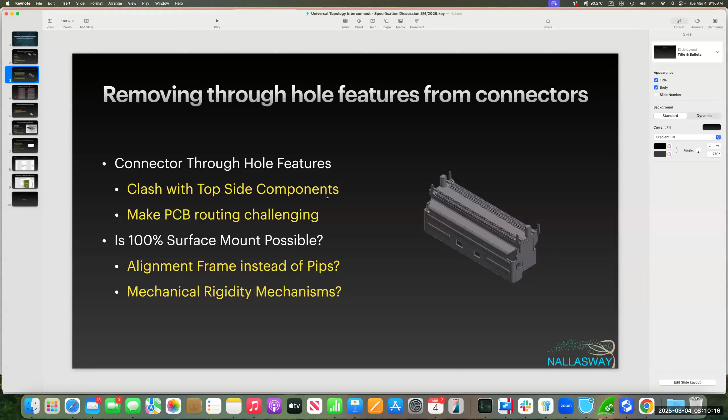Also, one of the features was removing the through-hole features, so that was that discussion we've been working on. I had a preliminary pinout proposal, and Amphenol and Lotes proposed an updated pinout to be more like the standard MCIO. So I need to update that table specifically, and I'll come on to that later. We are also looking at the capability of having this active cable thermal interconnect for mating to cold plates. And now getting on to the meat of the discussions I've been having with Lotes and Amphenol.

First of all, this is a recent email from Howard, you and your team, and I just summarized it here. So you're sending a cable to me, a PCIe Gen 6 cable. You noted that it's 26 gauge, so quite a thick cable. The raw cable thickness you said is 2 millimeters. Can you confirm that's two twinaxes on top of each other, like in this picture here? Alan, that should be 29 instead of 26. 29. Okay. That's basically two ribbon strips. So 2 strips is 2 millimeters. It's 2 millimeters, yeah.

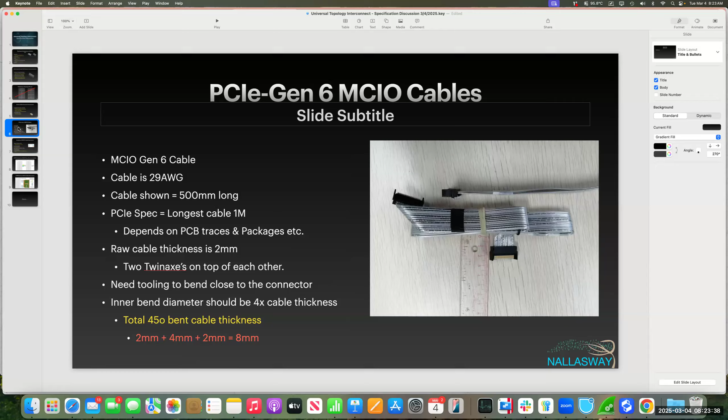I'd like to speak up here. I was thinking about 1 millimeter thick for the cable, and up here it says the raw cable thickness is 2. So I think we need to go back and look at our formula. But that's two twinaxes on top of each other. I think it's 4 for two twinaxes, because I just heard that a 30 or 29 gauge is 0.9 thick. I think we need to clarify how thick these cables are, shielded, insulated, everything. Is it actually 1 or is it 2?

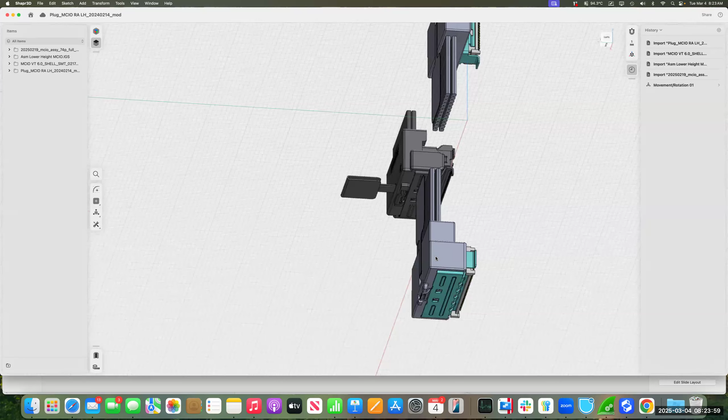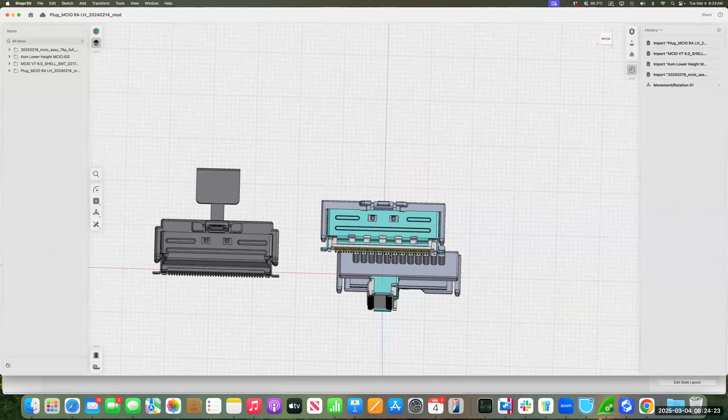This is probably a good time to jump to the models. Here's the models you sent me. This one on the right is what you sent me, Howard: the two pieces and one fully assembled piece. You've done the surface mount, except we don't have the left hand, right hand we were discussing. I don't think that's holding anything up. We still have a 0.3 gap. Oh yeah, for sure. But it is possible and you can do it? Yeah, it's just a stamping thing. Okay, good.

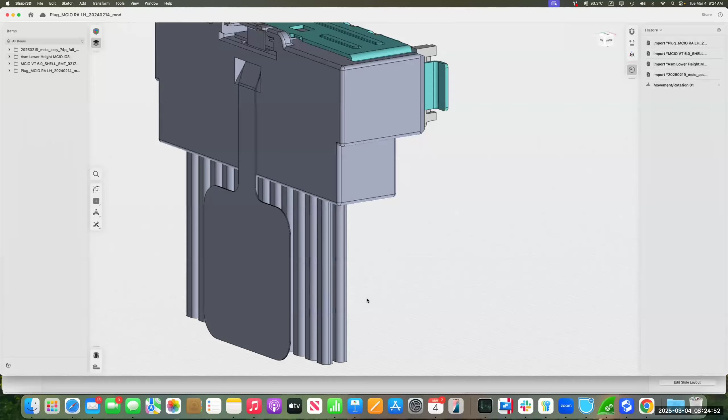Can you do a measure for that cable? Yeah, I did. I don't know if this model is representative of your 29 gauge, but an individual cable is 1.04 thick. Then you have a gap between them, but I'm assuming we can compress that gap. Yeah, as soon as it goes around the bend, it's going to go tight against each other. That's 2.505. So it looks like 2 millimeters is correct. I just don't want things to move forward and not be right.

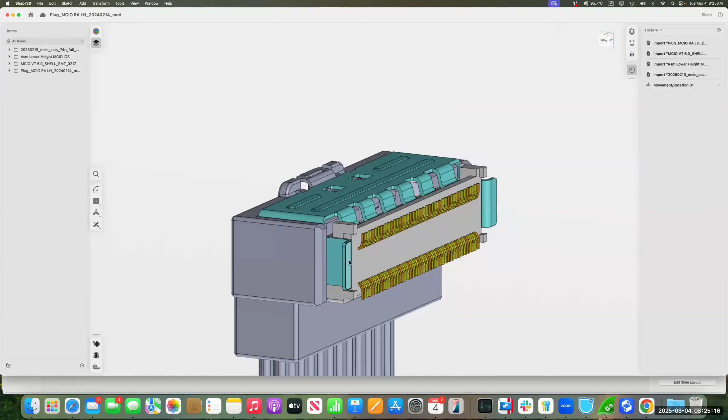All right. The other thing we were discussing was height. Sorry, not that, go right up to that. So you're at 9.18, is that right? That's low profile. Is that what you said? Does that add up?

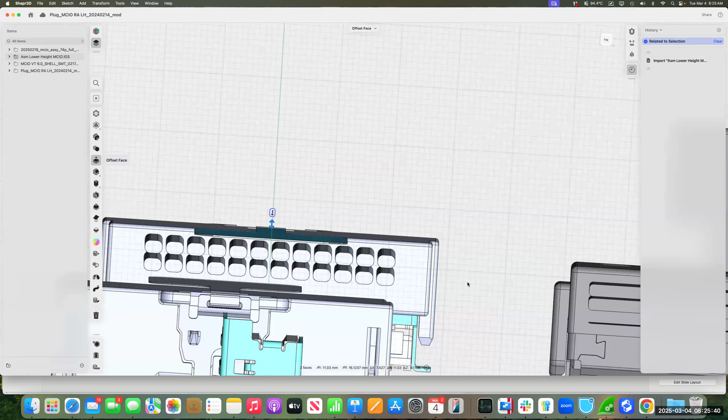I do remember you saying in one of your emails, actually, Howard. I'm looking at the numbers. Looks like 11.03, two faces on the text. Close to it, yeah. The height. Oh, hang on a minute. Have I got? Hang on. That's a good point, actually. Let me just reorientate myself to make sure I've got the right Z.

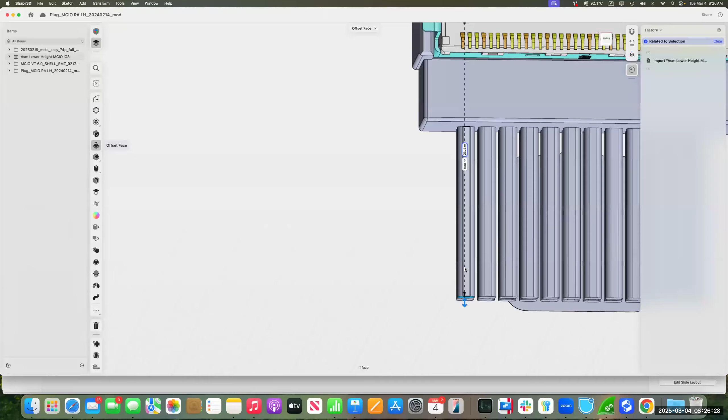Yeah, so Z is up and down. So that's 9.18. Oh, which way Z is? I think this is Z. Yeah, because this one is going to be the long. No, that's 23. Oh no, it's actually between the things I highlight. I'll tell you what, let me get a center pin here. If I get a center pin, we'll be sure we know we're looking at the right number.

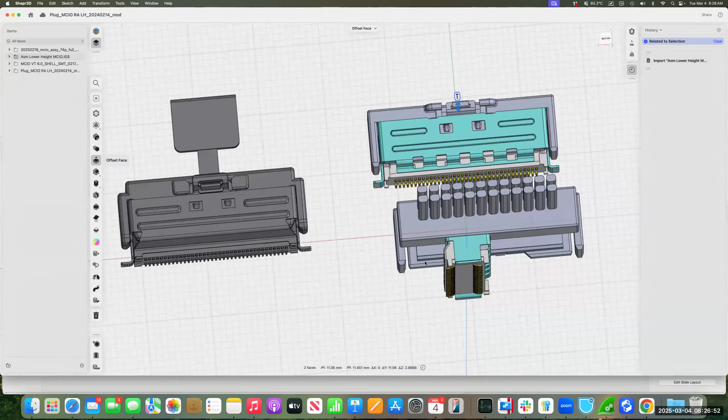To the tape. I do this. And that measures, oh, 11.06. Thank you. 11.06. That's a Y dimension, not a Z dimension. So Z is in the page. All right, fair enough. 11.06. Right, okay.

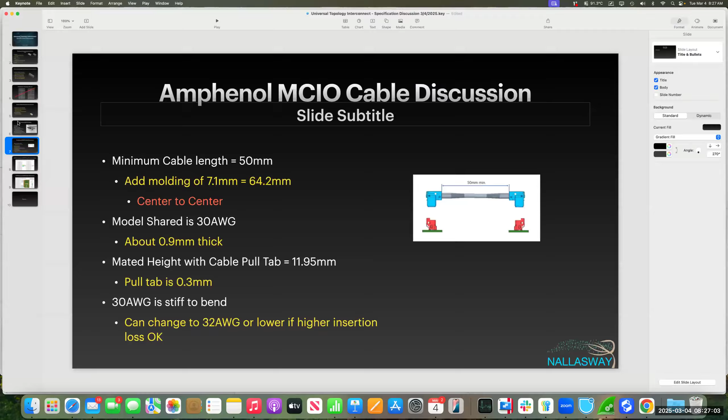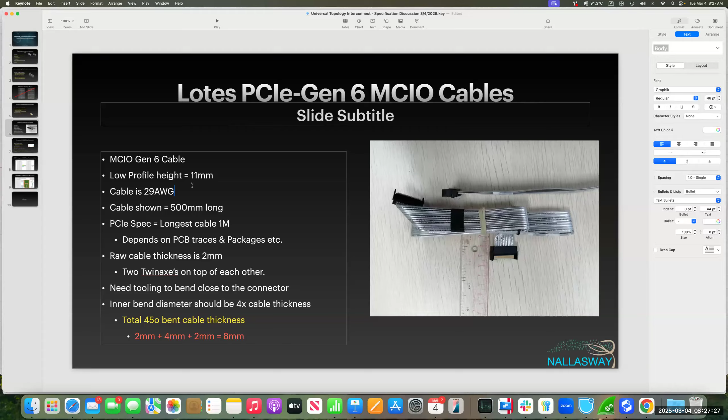So actually, let's just throw that in there. Actually, I might make this back to notes because there are generics in there, but there are also specifics in there. So let me just sort of throw in there: low profile height equals, I'll just call it 11 millimeters, round numbers. Yeah. All right. Okay, good.

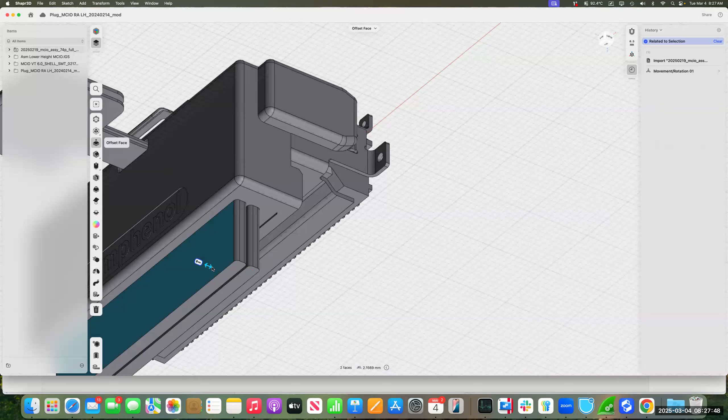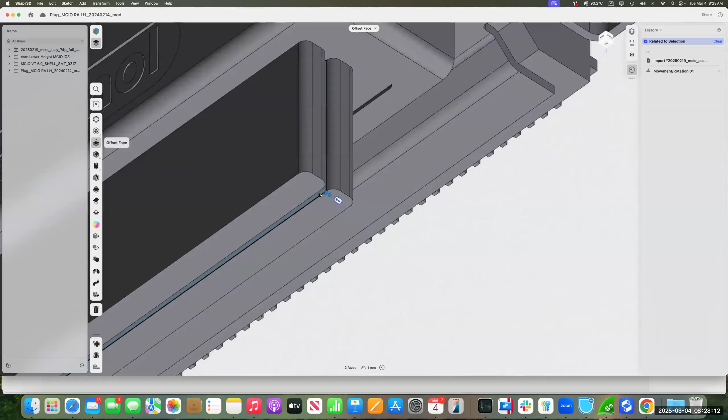Going back to the model and looking at these ones. So the one you sent me, Z, is this one just recently. And this one, I think when I've seen your models before, that's 2.1569. So okay, so that is right. So this is your 30 gauge version, I'm assuming. Yeah. So you've just got it around 1 in the model. Is that just for simplicity's sake? Yeah, just simplify.

One thing I did notice when you bundle them into a round cable as well, I noticed that the diameter of your models of the bundled round cable on a by 16 and a by 8 were identical when you've got twice as many cables. So it would be good if you could ask your modeling people to make it sort of representative. It would be helpful for us trying to do some space planning.

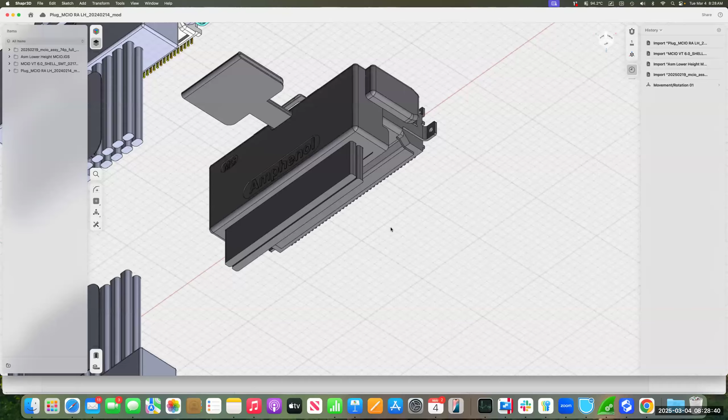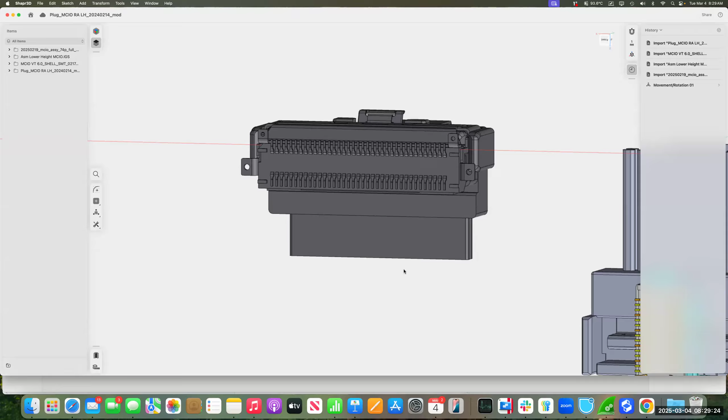All right, so now you've made this surface mount as well. You've gone slightly different. You've added additional feet here. I'm not sure if that's going to cause us any issues, and probably not a bad idea for balance purposes. Yeah, so we think when those through holes are removed, you need some stress relief, right? For the solder joints. So for pulling on the cable, especially as hard as we're going to be bending this thing, that gives us some torque support.

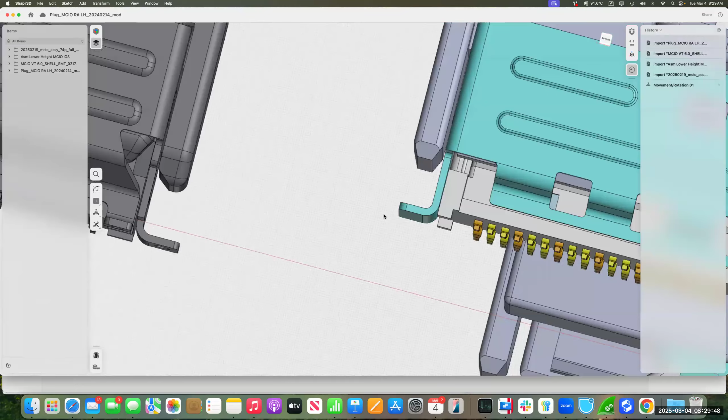Yeah. So I'm not objecting to any of that as long as it works in terms of centering everything. The only thing we are going to do is, with this foot, this foot should be 3 millimeters from what we discussed. Hopefully it's not 1.5. What does it say? 1.65, and it's buried. So we need to make that. In fact, there you go. From there to there is 1.4. So what we were wanting to do was make that 3 millimeters, and then a left and a right.

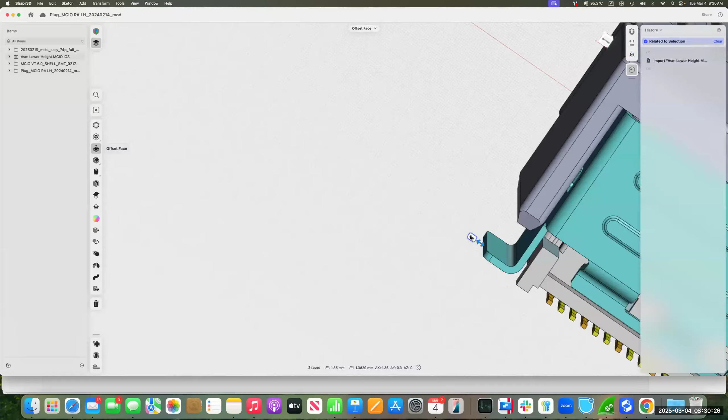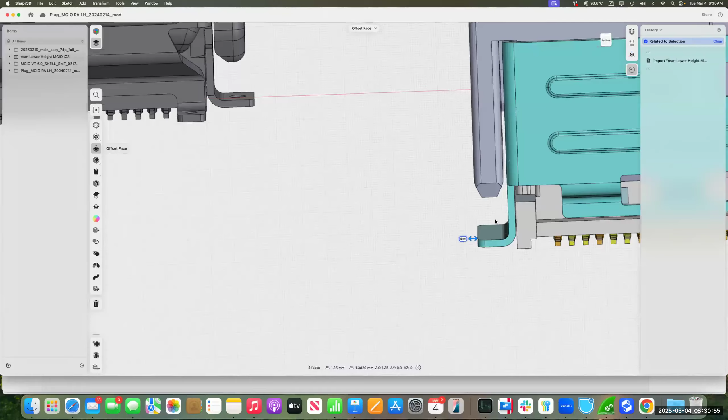Yeah, but if we're looking at the surface area, which is what is going to give us the retention, it doesn't make any difference because I've got to cut away half of this foot anyway in order to take the left hand part. Right. But for my model, we're gonna put a stiffening frame that will land on these feet. Yeah. But still, even if it lands on those feet, applying a torque to that is going to be thousandths of an inch in order to break the solder joint. And the hole that's shown here gives a well for the solder to wick into. So there's some nice features here with this additional foot and the holes through.

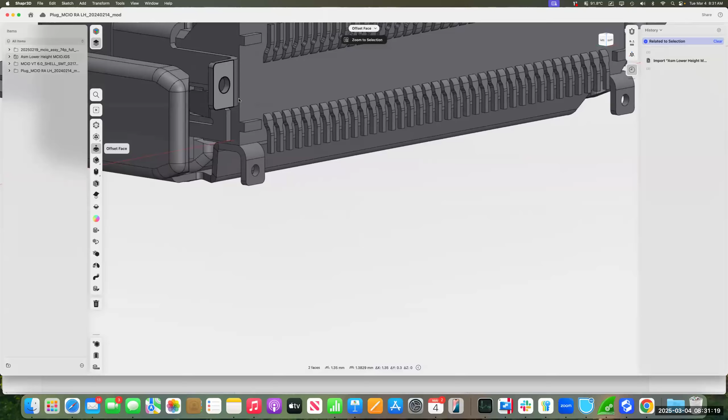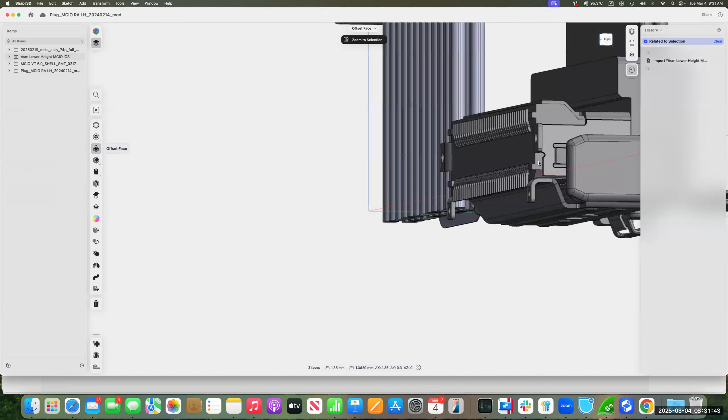Oh, and actually I see that you've done it left and right. You've done it left and right-handed, have you? No, you haven't. No, they're right down the middle. Well, not exactly right down the middle. They bump into each other. They do bump into each other, but they're not right down the middle. So is there any way that we can make these? I mean, these look smaller. It looks like we could put another foot on here.

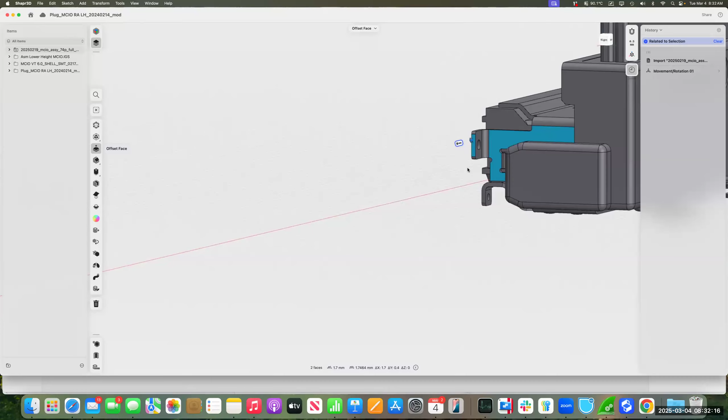So could we put this one down there and then that one up there? And then how long have you made this, Z? Let's have a look at this one. You've made it 1.7 as well. Yeah. So, I mean, if we could make that 3 millimeters, then again, I don't mind. You'd end up with a smaller foot offset, though I don't know whether they would help each other or not, depending upon how they're lined up.

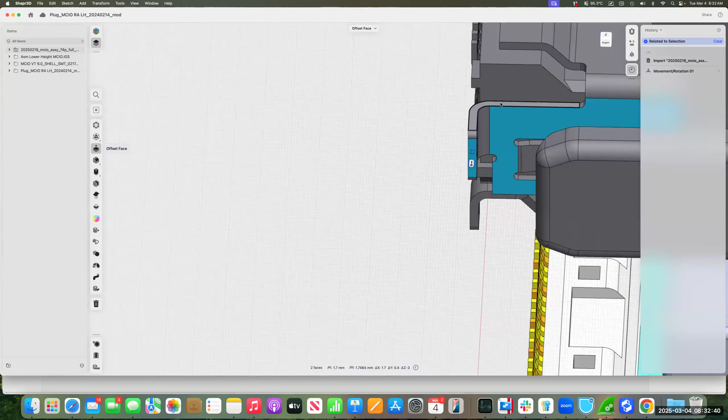Well, so you say a smaller foot. We've got this at the moment. This foot is coming from here to here, right. And then you've got this piece at the bottom. I don't know if that dimension there is exactly the same. Hang on a minute. Let's do from there to there. It's 2 millimeters, right? And then from here to here is 1.64.

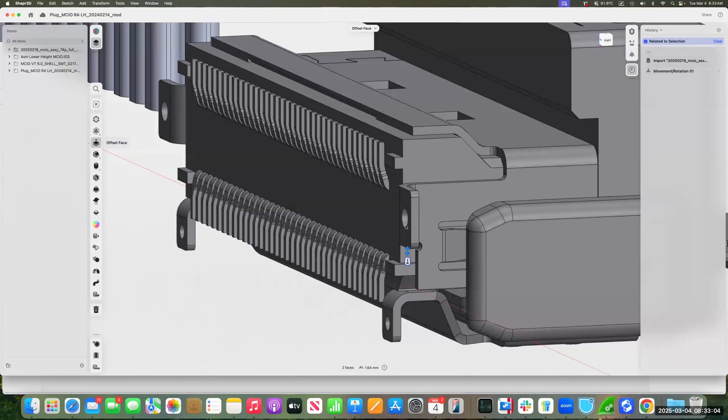So you'd have to make it 1.8 or something, 1.8 millimeters instead of the 2, and then do a left and a right hand. But do you know what I'm saying? If I put a right hand and a left hand together, I've got to remove material in order for that hand to come up close. Okay, I'm going to draw a picture. You drawing? Yeah, I'm drawing in Paint. I see. I mean, it looks like this one isn't too far off. I don't know what I'm missing here.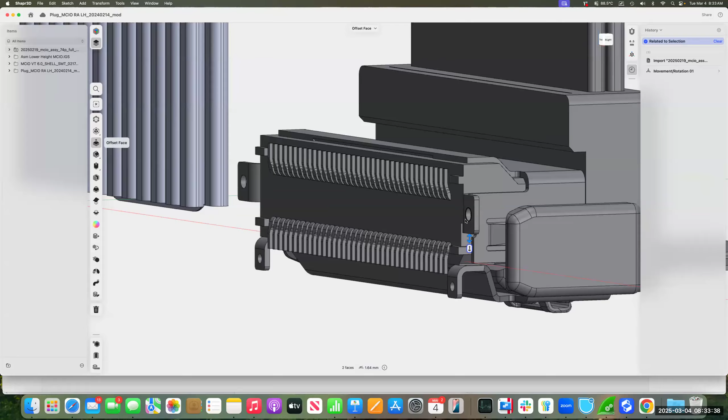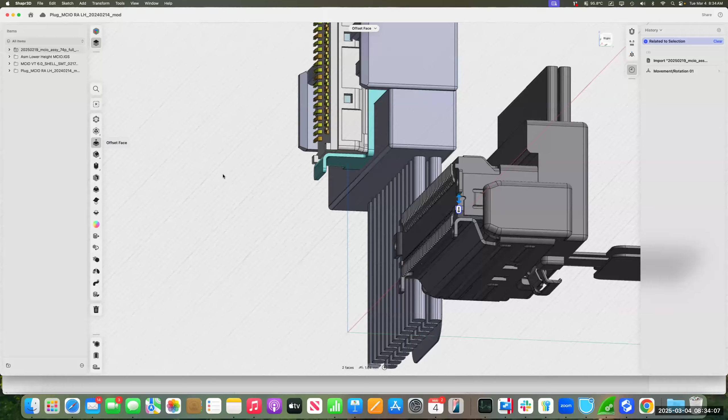So, Alan, what's the purpose you want to extend that leg? Geez, man. I'd need to load the other model in, and we'd have to wait 5 minutes for the model to load. If you remember, we had a stiffening frame on the module. Yeah, so you think your stiffener can press that leg down. That would be the idea. Well, it would still be soldered down for sure, but it would give you an additional mechanical holding of that leg. Yes. Yeah, I'm not sure that really helps.

You don't think? You will not add a huge force, right, against that leg. Right. And also the leg has a solder bump there, which means probably not that even. So you land on a solder bump. It's like a small hill, right? Hilltop, basically, for your stiffener. Right. I guess it depends on how much solder paste. If you've got a fillet, it's fine; if you've got too much solder, then obviously it might overfill for sure. Yeah.

Alan, let me share. Okay. A minute. There you go. I gotta see how to do this. Share.

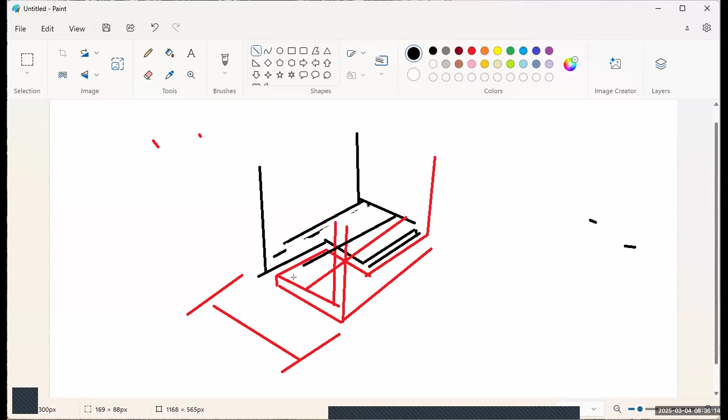So if we have 3 millimeters here, between here and here is 3, right? Right. So we have a 1.5 by 1.5 square, and the same thing here. Well, call it 3. If we do straight lines here, we end up with the same total solder surface area. Right. So I understand that. Yeah, agreed. So this area here for retention and this area here for retention are the same area.

Now, they'll get a little bit of lever arm advantage maybe here, but we also have removed all of this. Where's the pencil? All of this area, right? We just cut away in order to extend this foot. We've cut away all this portion of the foot when it was a wider foot. So we have no additional surface area added. No. So I would prefer that we make a straight, plain old foot here.

Right. Hey, by the way, it was you, Howard, that suggested the left and right foot. I know, and I disagree with myself. Yeah. I thought it was a great idea, personally. So I hear everything you're saying, and I completely agree. But the longer foot then gives us that extra area for us to land the stiffening plate onto. The stiffening plate is not going to be able to land onto a 1.6 millimeter foot. So therefore, you'd land on both the left and the right-hand foot of the two connectors.

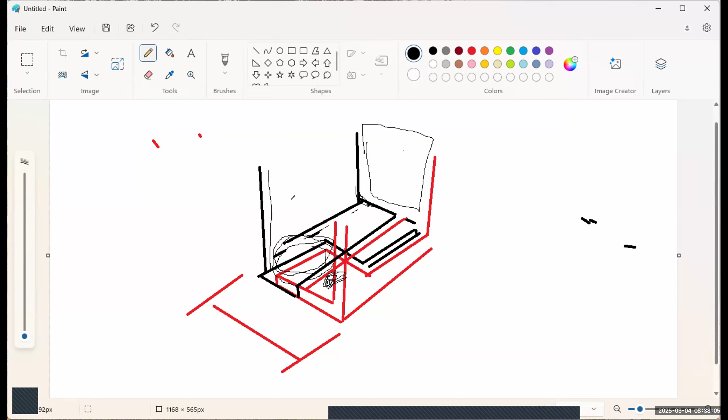So we'd end up with that. Here's them. Otherwise, the stiffening plate would pass through here, right? That's the idea. Yes. Going this way, and it would... So just this top surface area is what you were concerned about. Yes, so it would land on top of that top surface area. Yeah. That was the logic, anyway.

Here's my concern, that there will be some space between here and here, right? Right. I don't know, 0.1 or a couple thousandths, because this plate here is huge compared to this little tiny space. Yeah. And so there will be a gap in here guaranteed, right? Between the bottom of this as it comes through, so this really will not be holding these feet down at all.

Unless you have some compliant material at the bottom that does give you a compression force, but not obviously as much as if you bolted it hard to hard. Yeah, I don't believe that it's really going to touch 80% of the time. It is going to touch 20% of them. No, it's just saying, well, if you put some sort of compliant gap pad, which would compress, so it would definitely touch and compress. Even if you do, it's still only going to be 80-20.

Because the amount of force that's going to be per module is going to be a lot. So I guess it's what compression force you're going to get, because the heatsink is going to be bolted to the entire board, right? So there's going to be a number of things bolted to the board. The board's going to flex where, yes, it's not bolted, and so your point is valid on where it flexes.

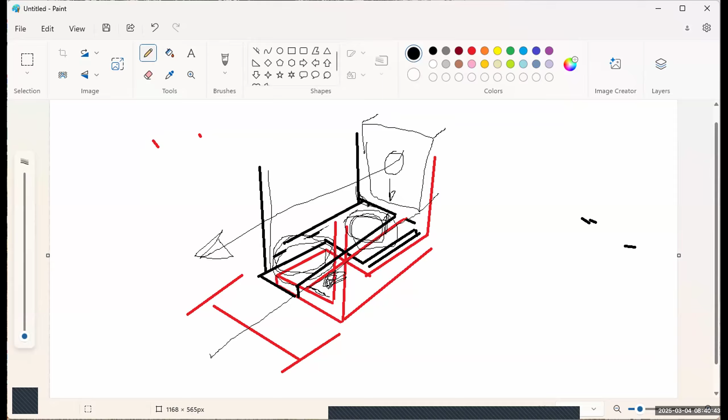Z, do you have a comment? Yeah, that was a comment I made before you showed the drawing, right? So I have the same idea as you. That mechanism will not work. Okay. So basically, you only can be able to touch a few top points. I think that's it. The little foot that you put over here is a much better solution to deal with the amount of force that's going to get on this thing when they yank the cable around.

Yeah, so I think the stiffener pressing down on the solder leg is not going to work because it will not press down the solder leg. Basically, it's not even. The solder bump is not even, right? So you'll only be able to press maybe 2, 3, I think 3 or 4, maybe a little bit more than the points, but it will not even touch every solder.

The board that lays under here, they're going to tip left and right a little bit. So things are going to get misaligned where the solder will wick one way or the other. Right. Maybe this is going to be like this, a little bit closer. But this surface is not a nice thing to control. All we really care about is that these make a good electrical connection down the length of the connector on the surface feet. These guys.

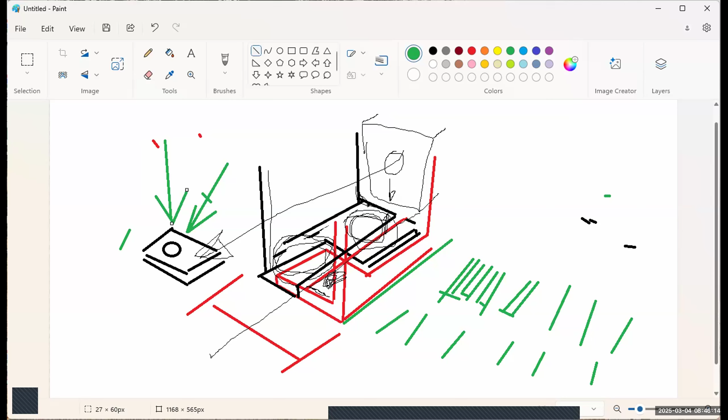But there's no point making the left and right to make it land. I really don't think so. And we're stealing a little bit of airspace in between. I think the left right thing, it's maybe able to do. Howard, I'm not sure. I don't see the big issue with a left right kind of design. No, I don't think there's a real issue with it. I just realized that it didn't help us. The foot gets long, it's 3 millimeters long instead of...

Yeah, no. The only thing in my mind, and again, I'm not a mechanical engineer, is whether, if not a thermal gap pad, but in the concept of a thermal gap pad, some sort of compliant plastic shim that is slightly compressible but would give you a mechanical force. So if this stiffener is heavily bolted to the board, and obviously the board will flex, but if in these particular areas we design it to land and we have some sort of compliant shim that will give some mechanical strength,

okay, it might not work, but if we don't put the left and right hand feet in, I've got nothing to even try. So if I've got the left and right hand feet, at least I can get somebody to do some mechanical simulations about whether this gives us any stress relief at all with a compliant shim of some sort.

Yeah, I don't have an issue with bending that part that way. And like Z said, we can do it. And the comment that you made, that the reason to do it is to give a surface for this part. Yeah. My thought was that it was really a surface tension ability to hold the connector from getting pulled off the board.

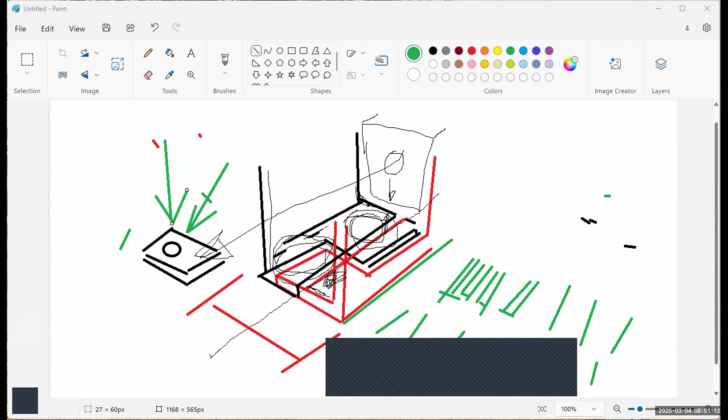The solder footprint will be larger than our lead frame, so the solder will be on the top of our lead frame after reflow. Right. Yeah. And we cannot really precisely control that. Right.

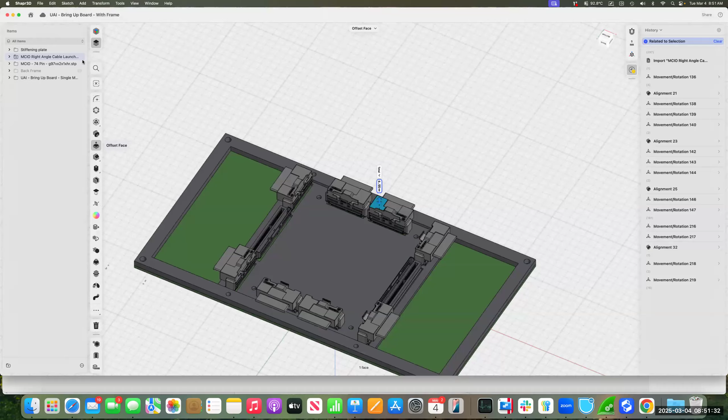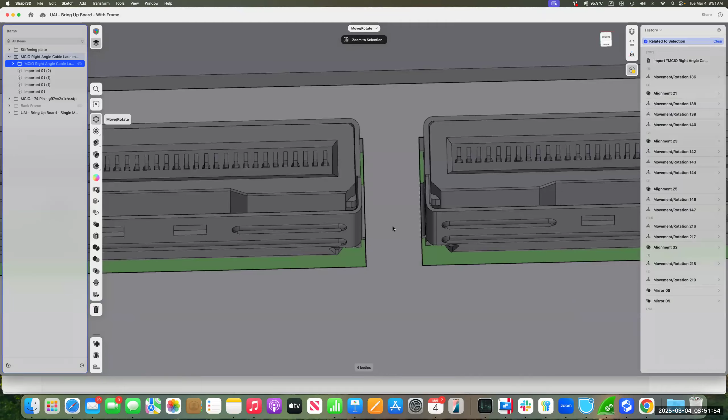So this is what we were... So this is all part of the frame. So this is where we're coming in here, where we wanted the right and left. So yeah, okay. But what you're saying then is, in fact, if I just hide this a minute, where's that stiffening plate? If I hide the stiffening plate, looks like we've put your connectors down. So what you're saying here is that, in fact, let me just lift this one up.

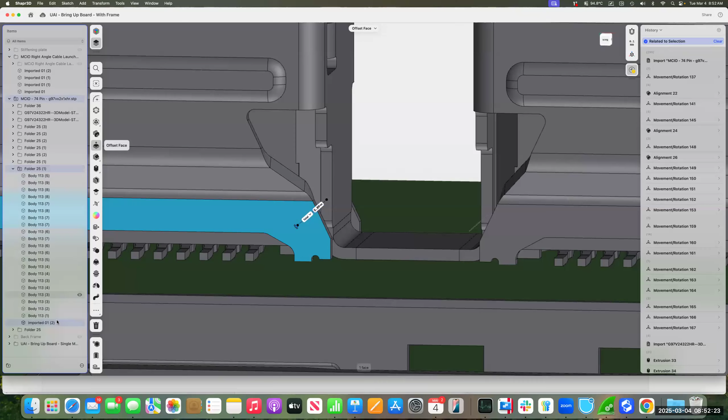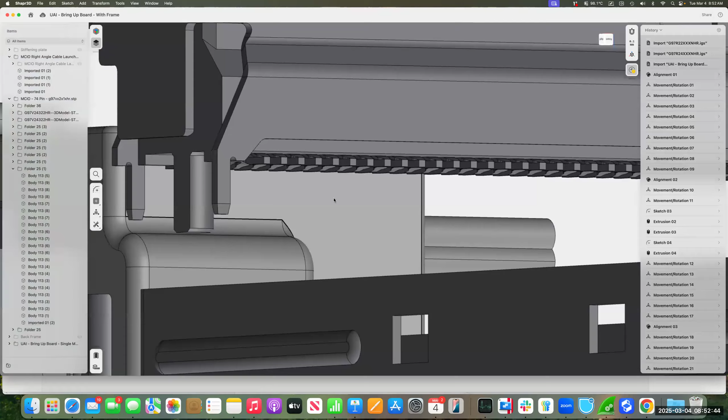Oops. Oh, this isn't the connector. This is a through hole one. That was what Ben did. He made it surface mount itself. Okay. All right. I need to go back into the other model. For some reason these are huge models. They take ages to open. All right. I get the point. I get the point.

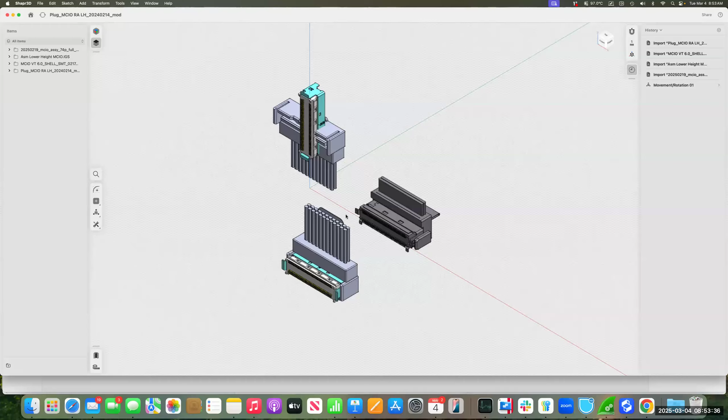So the only other thing I was going to say was back on that other model, actually. Oh, that was quick. That worked well. So I guess if somebody does yank one of these cables left or right, if you pull on it, you'll get a tilting force on the connector, right?

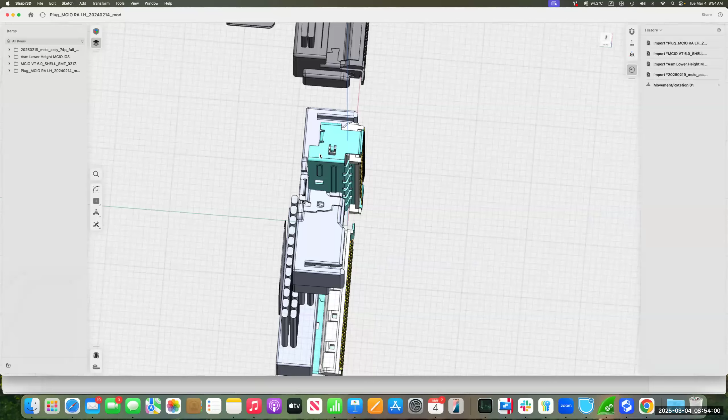So if somebody's pulling the cable in this direction, it's going to tilt a certain amount before it tears it off the board, one assumes, right? A little bit. Are we talking a millimeter before it tears it off the board? Oh, way less than that. Way less? So you'd say like a fraction of a millimeter before it tears. Obviously, at the bottom, you've got the moment of the height of the connector, right? Yeah.

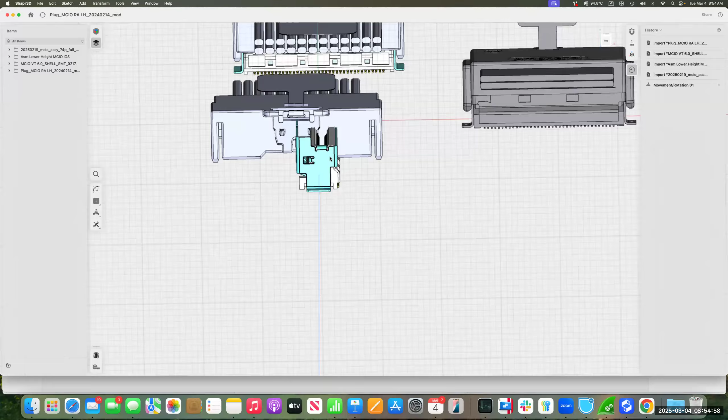So how much do you think it would move before it would tear it off? I don't have a good feel for that. Yeah. So what I was wondering is if our stiffener is wrapping around this. I still think the tolerances are not available to us to do that. Not available, right? No. And plus we can't wrap around it too much anyway, because you've got the body of the cable plugging in. You've got to plug the cable in the top, and we're going to yank on it when we do the bend. Okay.

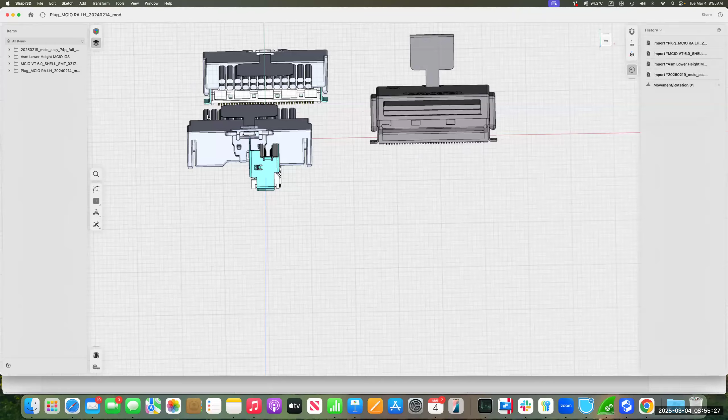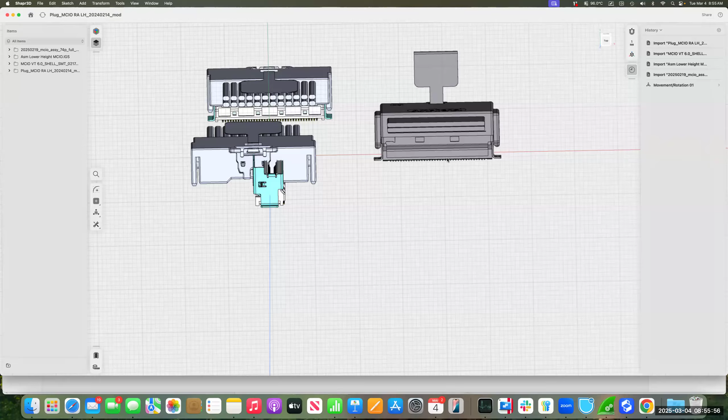The only other thing I've seen is people epoxy these things down, but that's another process step in the manufacture. Nobody wants glue in their factory. Right. Okay. So in terms of the viability of this, if we go surface mount, is there any sort of stress test we can do of what force would tear these things off? I'm sure there's a test for that. And Ariel, I need help from you on that. Yeah, there is a test that we can do to determine how much force it would take to tear off that SMT connector in general.

And can we assess whether that just means it's not viable? In our situation, these topologies will be assembled in the factory. This isn't a customer, somebody at home plugging into an MCIO. This will be at manufacture time. So to that extent, you could say there's more careful assembly than your average Joe buying a motherboard and popping it in. Yes and no. On these manufacturing lines, you get your average Joe a lot as well. Yeah.